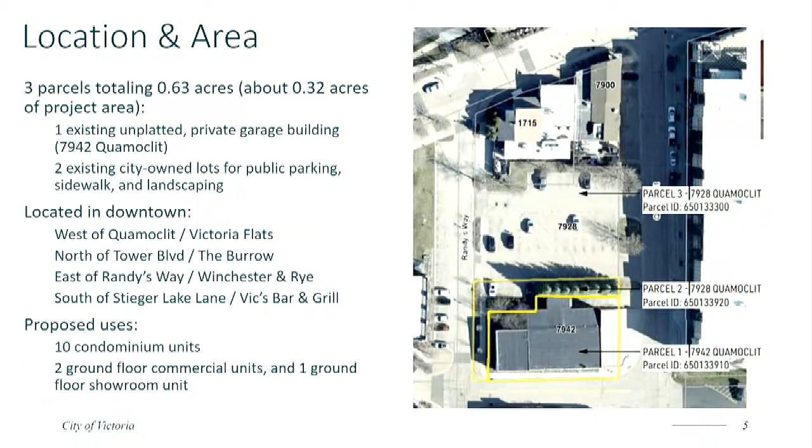So the existing conditions: they have that single structure for a private garage storage, and they also have the adjacent city parking lot, which currently has 43 stalls, with access points from both Randy's Way and Quamoclit. There are also utilities available along Quamoclit and Tower Boulevard, and it's also within 1,000 feet of Stieger Lake, so Shoreland comes into play here.

As I mentioned, this was reviewed back in 2022. There are some renderings attached here showing the previous proposal for the 63-unit apartment building as well as the parking deck, which would have accommodated the commercial users as well as the apartments and provided additional public parking.

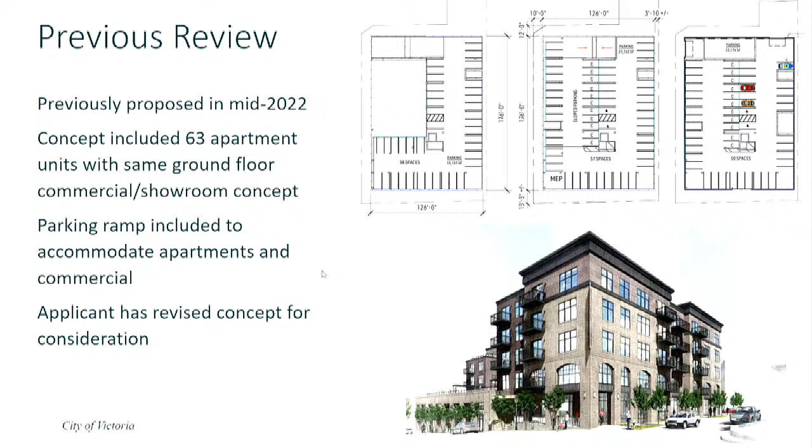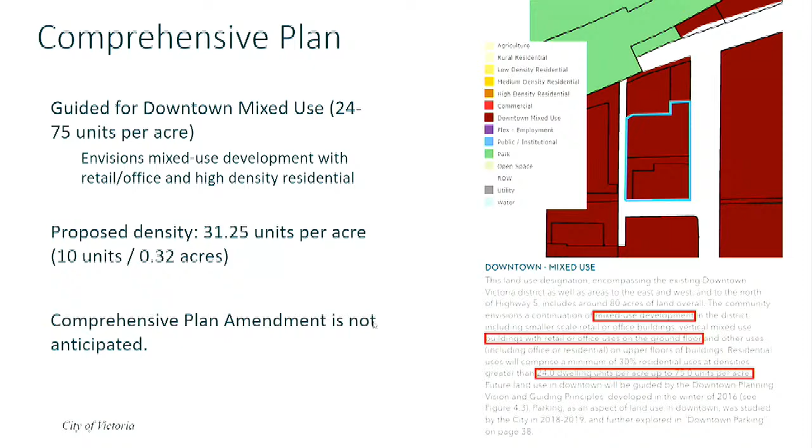In our comprehensive plan, this area is guided for downtown mixed use, which allows development between 24 and 75 units per acre and envisions this type of mixed use development. Their density for this project comes out at about 31.25 units per acre, so it's within that comprehensive plan guided density. So we do not anticipate that a comprehensive plan amendment is needed for this request.

It's also zoned Central Business District, which is our downtown district. We allow mixed-use buildings and various commercial uses such as showrooms with a conditional use permit, so that's part of their request tonight. If they come back at final plat and say they are putting a pool on the rooftop deck, for example, that's something that could require an additional CUP in the future, so we'll take a closer look at that as users become known for those commercial spaces, as well as what type of amenities will come with the building.

The only bulk standard that we have in our CBD is a maximum height of 50 feet. They are proposing 49 feet, so they are compliant with that. And just to note for scale, that's similar in size to the Victoria Flats building, which is right next door.

So for conditional uses, as I mentioned, mixed use and showroom uses are conditional, as well as any commercial use within the Shoreland area. So they have to meet our general conditions per our zoning code, such as consistency with the comp plan, health and safety, compliance with any of our other zoning code standards, adequate public infrastructure, adequate screening and landscaping, appropriate architecture, correct zoning, and that the traffic isn't going to go beyond what this area is needed for.

So none of these uses applied towards our specific conditional use permit requirements that we have in a separate section in our code. And then, as I mentioned, we'll evaluate if they need additional CUPs in the future based on users and residential amenities that come in.

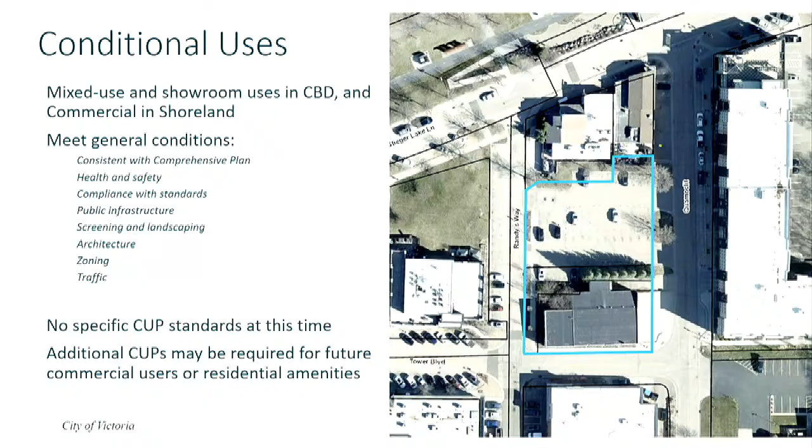So for streets and pedestrian connections, they are proposing only a single access from Quamoclit now. You may recall in one of my earlier slides there was an additional access here; they're proposing to eliminate that. The 2 access points on Randy's Way would remain, so traffic could flow through the angled parking in on the southern entrance and out on the northern entrance, or people could come in and out on Quamoclit.

Additionally, they have the underground parking access directly off of Randy's Way going down into the basement of the building. And just an additional note for pedestrian connections, they are proposing sidewalks around the site and leading up towards the end of Quamoclit there.

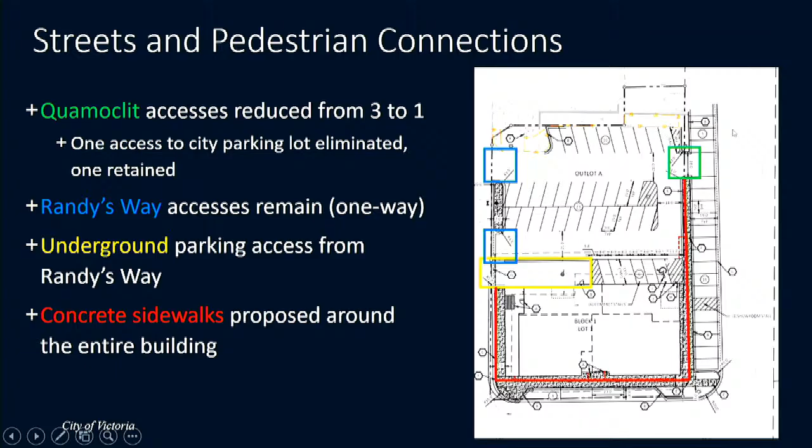For parking, the site currently has 43 stalls. They are proposing a total of 81 parking stalls with the project, so that includes the 20 underground stalls, which gets us to our 61 publicly available stalls. They need 17 stalls for the 2 commercial spaces based on their square footage and our zoning code requirement, and then 3 stalls for the showroom use. So even after those accommodated uses, there are still 41 public stalls available with this project.

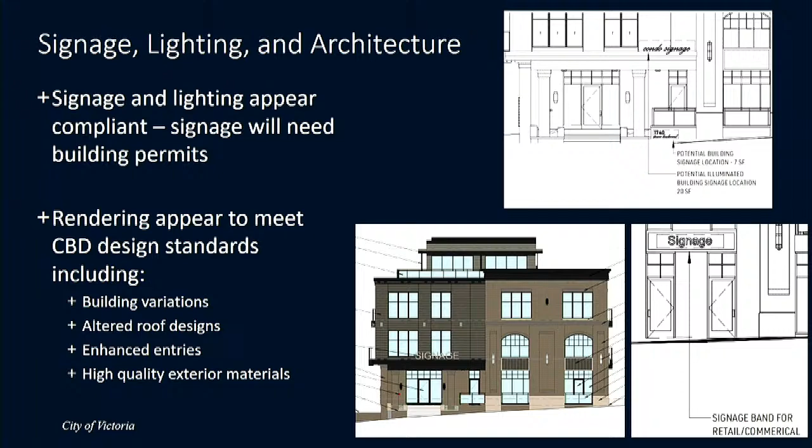For landscaping and tree preservation, they need trees in the boulevard every 35 feet adjacent to the right-of-way. They need foundation plantings placed where practical, and the CBD is exempt from open space and minimum planting requirements. So the tree preservation, we're at preliminary plat here.

Looking at parkland dedication, they would have to dedicate about a fifth of an acre or $21,000 for those 10 condo units, and the commercial projects less than 1 acre are exempt per our municipal code. The cash is anticipated because they aren't proposing any parks or trails with this project.

Then looking at stormwater management, they have to meet the MCWD's rules. We don't anticipate any wetland impacts, but there is some stormwater that needs to be considered, as this site would rely on our downtown regional stormwater facility. And then as part of the variance approval, the DNR has requested that any additional stormwater for this site that is captured over that 80% allowance is appropriately captured and rate controlled.

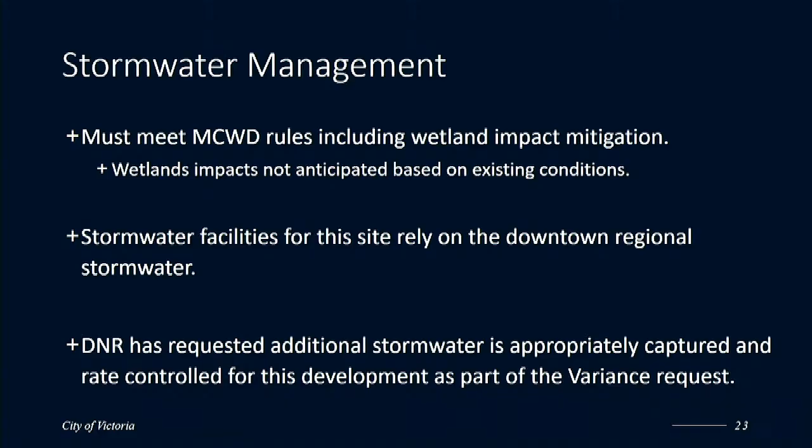For site utilities, water is proposed to come from Quamoclit and sewer from Tower Boulevard. In the staff comment memo attached to this case, there were some minor comments from engineering, but those will just have to be addressed prior to final plat.

Tonight this requires a public hearing. We published it in the Waconia Patriot on November 20th and mailed notice to property owners within 350 feet of the development's boundaries. We also posted it online and at City Hall. Prior to this evening, staff have not received any comments.

Lastly, I have some suggested conditions of approval for you to consider if you're leaning towards recommending approval. I'll note the two items highlighted in blue. Number 2 here, we need a staging plan before we would consider a final plat, because this is a very sensitive area right in the heart of our downtown. We want to make sure that when this development occurs, it will be staged appropriately for construction.

And secondly, that any changes in those commercial spaces — so if the showroom use becomes retail in the future — we want to make sure that's going to be adequately parked as well. Very good, thank you, Brian. Does the applicant wish to speak?

Hi, my name is Marty McCarthy. I'm here on behalf of Monarch Development. I'm one of the developers. We are partnered with another development company called Ganya. Just a little background on myself.

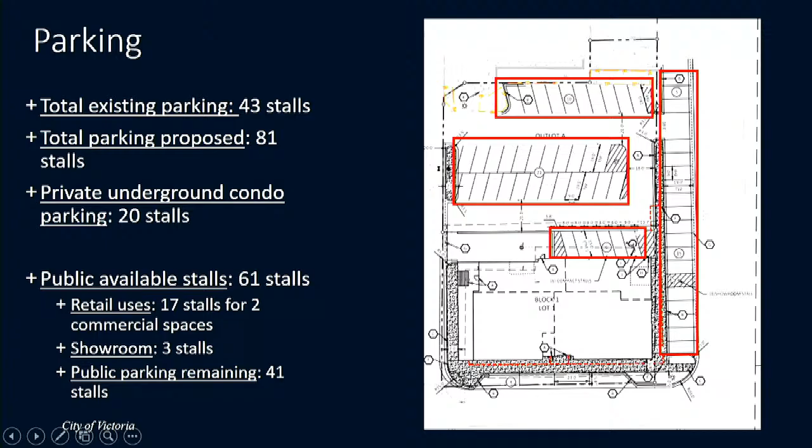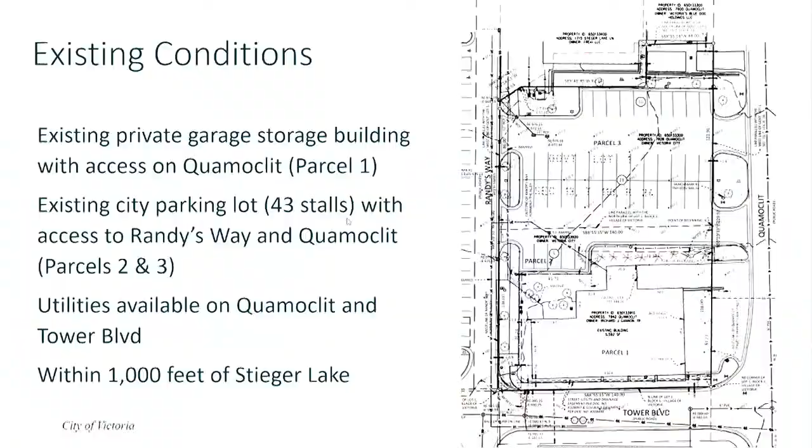Chair and Commissioners, I can jump in here. Looking at this space specifically, going back to the parking slide, they have one dedicated space here that I don't believe was included in the calculation — that's why it's graded off like this. Additionally, in the parking here, we have another dedicated space for that unit. So we have at least 2 spaces in case uses change in the future that could be dedicated towards that. Does that answer your question?

Well, I guess, does it answer the question of whether, if that was converted to retail space, it would then comply with the parking requirements for a retail space?

For a retail space, it would not, based on the size. Our requirement is 3.6 spaces per 1,000 square feet. It's about a 1,400 square foot unit, so we'd probably need about 5 or 6 spaces to be compliant. Now, where those come from in the future, that could be discussed. There are alternative locations within our downtown. We're also looking at other potential areas for future parking internally. So it's something that likely won't be utilized for potentially 20, 30 years, but it's something we should keep in mind.

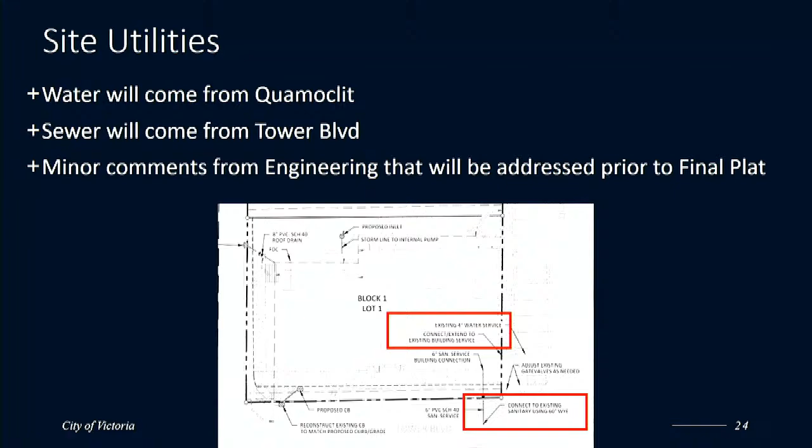Chair and commissioners, sorry, I'm jumping through the slides here. This image doesn't have it, but the plans you're seeing in this presentation are actually a resubmittal after that latest comment memo. We sent a new memo yesterday, but it was too late to attach it to the agenda. The fire department did not have any additional comments related to that hydrant with the submittal.

Mr. McCarthy, I was wondering if you could walk through a little bit on that ramp that goes down to the garage—what kind of safety screening, how high is that wall adjacent to the parking lot that would prevent somebody from climbing over?

The wall is high enough that it would require a safety guardrail. At the top of the wall, there would be an additional railing.

Do you happen to know the total height? Typically 42 inches is required for a guardrail. Do we know how tall that wall is at the deepest part of the ramp? I think it's about 10 feet.

And then, back to Brian, when we're talking about the variance request on impervious surface from 80% to 90%—I'm thinking in terms of the property as it exists today, we've got to be close to 90% already. 82 currently. Okay, so there's only a little bit more impervious surface than what's already there. What are we losing—the trees, the strip of trees? That's about it, correct.

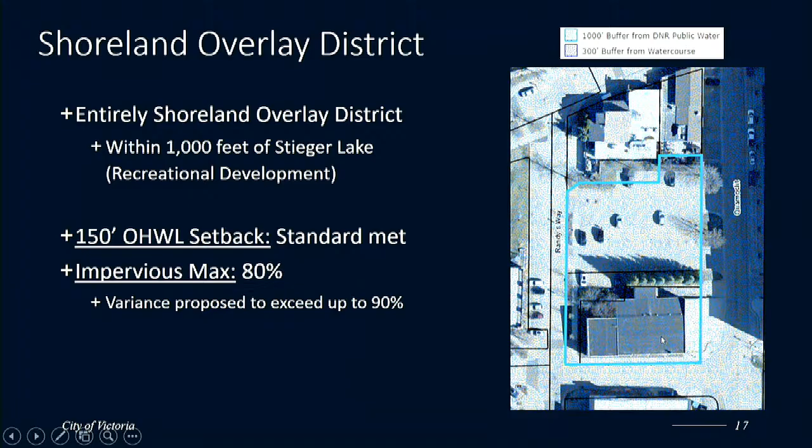So you can see there's a tree here in the image on the right and a row of trees here—that's essentially what we'd be losing. The landscaped islands and areas surrounding the parking lot would remain the same, and they've added a corner boulevard tree and some shrubs in this area as well. We did lose some impervious surface because we were expanding Randy's Way by 2 feet, at the request of the fire department to give a better turn radius onto that road. So we lost a little bit of permeability and island features we could have had.

If I could just add one follow-up question—I think this, Brian, is for you. My understanding of the statute is that the uniqueness test is relative to the uniqueness of the property, and the condition not being created by the owner. We have a plot of land here with a building on it today that has 82% impervious surface. The current plan, as I saw it, was going to go to 96% impervious. The city wishes to impose a standard of 90. Help me understand why this is not due to the plan for the building as opposed to the property itself.

Yeah, I'll comment on this a little bit. I'm Mark Anderson, civil engineer with Sambatek, so we worked on the site grading and stormwater management.

And yeah, you're absolutely right, the impervious area does increase on the order of about 10%. But for a small site like this, it's really a small amount of square footage, and for good reasons. We wanted wider sidewalks for snow plowing, a wider Randy's Way, and more parking. All of that creates impervious area.

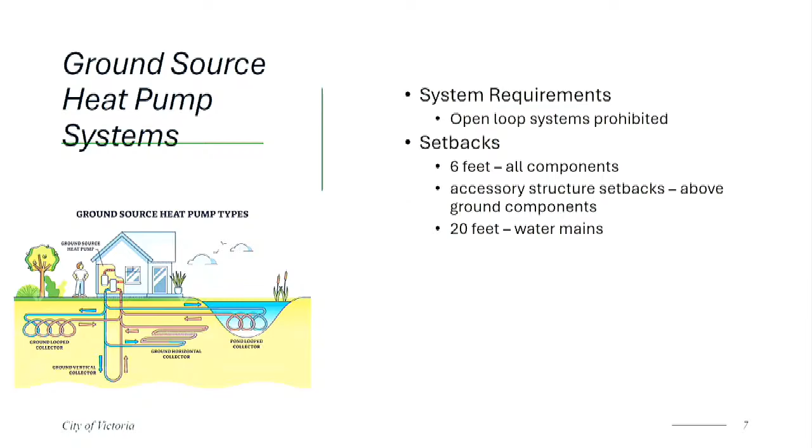Some of the things we also look at are setbacks, which is a minimum of 6 feet for all the components from the property lines, so we're trying to stay out of those easements as much as possible. Generally these aren't placed in front yards, so the 10-foot setback isn't too important to look at. The other thing we want to look at is anything above ground, we want to treat with the same respect to setbacks as an accessory structure. The other thing is 20 feet separation between our water mains, which falls in line with our fence regulations. I'd like to point out that in the packet put out tonight, the ordinances state 5 feet for the 20 feet, and state 5 feet for all components, which was changed to 6 to line up with what we do with other things.

We also look at wind energy systems, also known as WECs, wind energy conversion systems. So if we see that term throughout the code, that's what that means. The big things we looked at are location and height restrictions. We want to make sure they're not over any bodies of water, including any streams, lakes, or rivers. Well, we don't have rivers, but lakes and streams for sure.

We also want to make sure we have a setback, so in the event that one of these systems would fall to the ground or have some catastrophic incident, we're providing a large enough buffer to create safety. That would be 1.5 times the height of the pole and at least 1,000 feet from residential districts. This is a pretty standard distance used in other communities, as well as the safety guidelines for larger windmills. We also want to make sure we have a blade clearance so that if someone was to walk underneath or during any maintenance, they wouldn't get hit with the blade. In the large windmills, if you go up to them, you can actually hear them a little bit on quiet days, because the tip is sometimes breaking the sound barrier, so you don't want to get hit with that at all.

We also want to prohibit any unauthorized access to ladders, so setting a minimum of 25 feet for an access ladder on the outside, or making sure there's a locked door for an internal ladder. We also want to look at the design, sticking strictly with monopole designs unless approved by the city council otherwise, which allows for some creativity while allowing for some uniformity. We also don't want any type of alternative energy system to be used for hanging signs or doing any type of advertising on it. And we want to make sure the design incorporates any safety measures or requirements at the state or federal level.

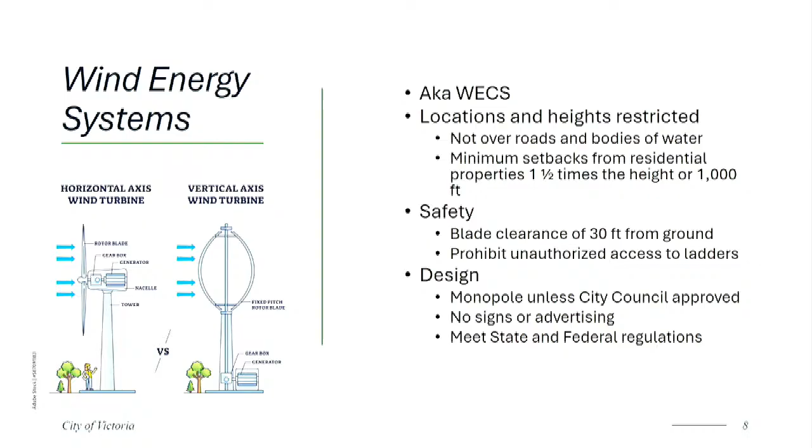We look at solar energy systems. There's three primary solar systems that you'll see. You'll see roof mount on houses where they're mounted directly to the roof. You'll see poles used to mount into the top of buildings. Generally, commercial buildings use some type of structure to elevate it off a flat roof. Or you'll look at something being placed on the ground.

This is permitted as accessory use. It's something that is fairly common throughout Minnesota. We want to make sure that building mounts stay within the footprint and they count towards the height of a building. We looked at the project proposed tonight. They're at 49 feet with a maximum of 50 feet. If they wanted to put the system on the top of the roof, they'd be restricted to no higher than one more additional foot of elevation.

For the ground mounted systems, we want to make sure they meet accessory setbacks. Primarily, if someone was to ground mount on a residential property, it would be in the backyard, but more likely it would be placed on the roof where you'd gain more sunlight. But we do have larger properties that we need to consider in addition to the smaller properties we have in town. We also want to make sure that by the installation of any type of solar panel, we don't create any glare, we don't create any traffic concerns, we don't create anything where the light emitted or reflected could cause discomfort with adjacent properties.

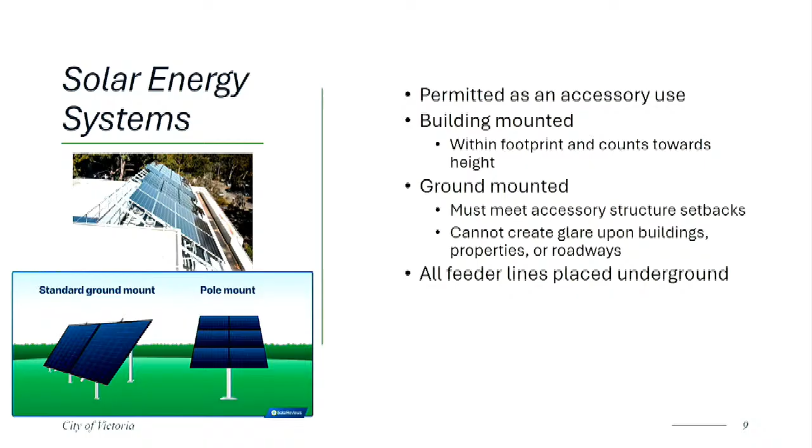We also want to make sure that all feeder lines are placed underground. That's not only a safety aspect, but it's also an aesthetic aspect to take a look at.

There's abandonment and conflict considerations if solar panels are discontinued in their use, as they do have a life, depending on what you get, between 15 and 30 years. Once they've stopped their operation or been disconnected, within 12 months they've got to go. So that would be an enforcement action.

The other thing we want to look at is, especially with solar panels, there's a lot of federal regulations that can get put in place as far as how they're constructed, and there are different changes at that level as well as the state level, as well as goals set in place with the Met Council or whoever. So we want to make sure we looked at the strictest law being used to regulate them. If there's a law stricter than ours, we would use that to apply with any regulations or rules from any of the primarily state agencies.

So with that, is there any questions on the alternative energy systems?

Just one quick one. So, no signs or advertising on the top. What about communication antennas or anything like that? Is that permitted? Commissioner, on alternative energy systems, you generally wouldn't place those type of devices on there. That's not to say they're not used for communications, as far as if you have a windmill put in place of having some type of antenna on top for controlling that. You're talking about like a cell phone tower or something. Yeah. Is that restricted? Correct, so that'd be restricted.

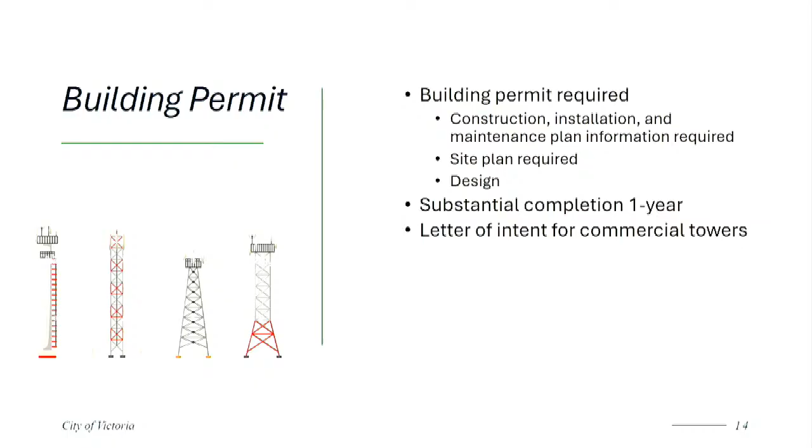We also want to make sure we get a letter of intent from any commercial tower users that would do that. We look at our bulk and performance standards, so there's a lot of things the city is going to want to take a look at to make sure that any tower that's put in place, and its type of use and design, are appropriate for the community.

So we want to take a look at height restrictions, setbacks, where it's placed, what type of construction it is, what the design of the tower looks like, and co-locations.

Generally, when you build a wireless tower, for example, one that I went through is 185 feet tall. It had 5 co-locations on it. What does that mean? It means there are five different areas where you could put five different services. One of those services in the agreement we went through was for the county's emergency services communications—so police bands, ambulance, fire, and things like that.

We also want to make sure that we look at lighting. If there's a tower there, there's minimum lighting that has to be done depending on the height and federal and state regulations. However, we want to make sure we don't have something that's going to cause an issue with the neighborhood or just be aesthetically unpleasing or detract from wanting to be in the area of the tower.

Signs and advertising, again, would be prohibited. These are designed for a specific purpose. They're not an advertisement—we have billboards that would allow for that.

We also require different types of landscaping. The main reason that's in there is when you have a tower, at the base of the tower you'll generally put down what appears to be a 20 or 40-foot conex box, where you'll have your power sources and all the communication equipment needed on the ground to transmit that signal back to the host user. So we want to make sure that's put in place and still aesthetically pleasing, or at least hidden.

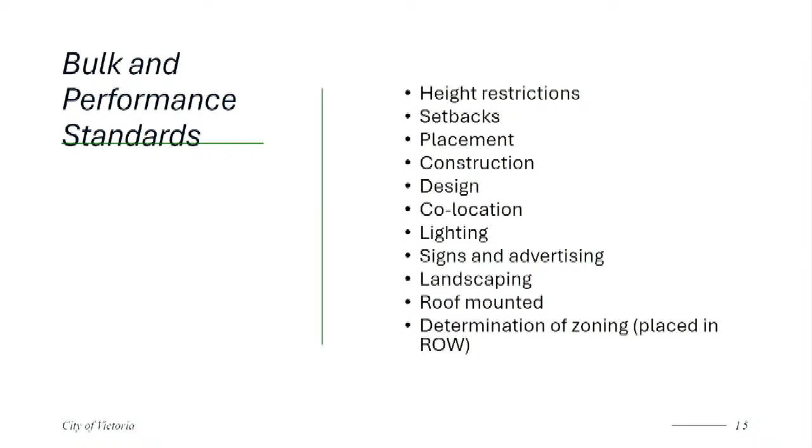We look at temporary mobile towers. There's height restrictions that we want to make sure we place in there, as well as setbacks, restrictions from the residential zoning areas. We want to make sure they're wind resistant. You don't want a temporary tower going up and then falling over.

We want to make sure there's a limit on how long they could be there. 120 days is pretty standard. They don't need a building permit because they're generally on a mobile platform. And we want to make sure that if there's a denial of allowing them in, or some type of issue that's created, they have an ability to appeal that decision with the Planning Commission or the City Council. We also want to make sure they don't interfere with public safety signals.

Now, your temporary mobile towers are generally used for two purposes. One, there's an incident that happens, such as a tornado, if it came through Victoria and took out a cell tower, Verizon, T-Mobile, AT&T, whoever else could come in and they could set up a tower pretty quickly to provide service so that people can still use their phones.

The other thing that happens is when you get a different type of sporting event or large gathering where you're going to have a lot of people using the cell tower, if they don't believe there's enough bandwidth to handle that, companies will generally bring in a mobile tower to handle with that.

Looking at the appeal of administrative decisions, one would be we don't allow them in residential districts, but if they needed one in there, they could come to the Planning Commission or City Council to move it in, else they would have to just stay outside the residential district. Generally these will go up 60, 80, 90 feet in the air.

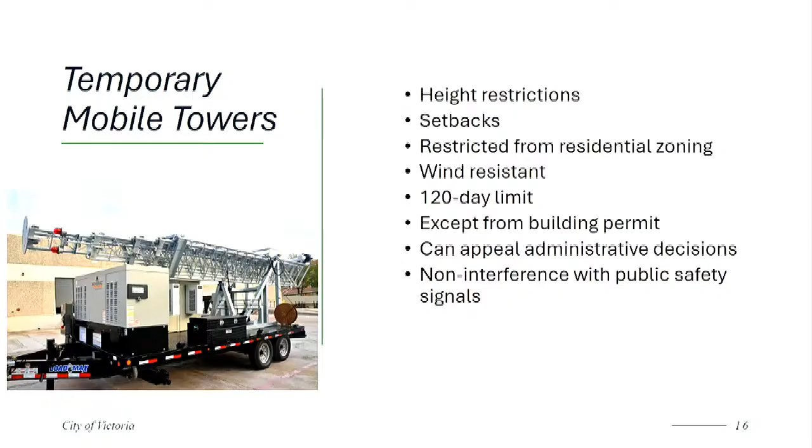So there are various things. The example on screen is just one example of what these can look like. They come in many forms.

Touched on the small cell wireless earlier. You'll see a lot of this is just small cell wireless. Permits are required for it. We can apply reasonable conditions because they would be attaching to public infrastructure generally.

With the application that does not require a conditional use permit, conditional use permits for the land use - right-of-ways don't have a PID to them. They're a right-of-way. We would want to require co-locations.

So if you had multiple providers, say you had a cellular company who wanted to use one of our light poles to put an antenna on, but we also had a telecommunications company that wanted to create Wi-Fi hotspots, we would want to make sure that we put them in the same area. That way the distraction that it creates isn't multiplied by multiple locations.

There's height restrictions, 50 feet or 10 feet above a structure. So if you attach it to a light pole or you attach it to the side of a building, you can go 10 feet above it, but you wouldn't be able to attach it such in the air that the top of it would be greater than 50 feet.

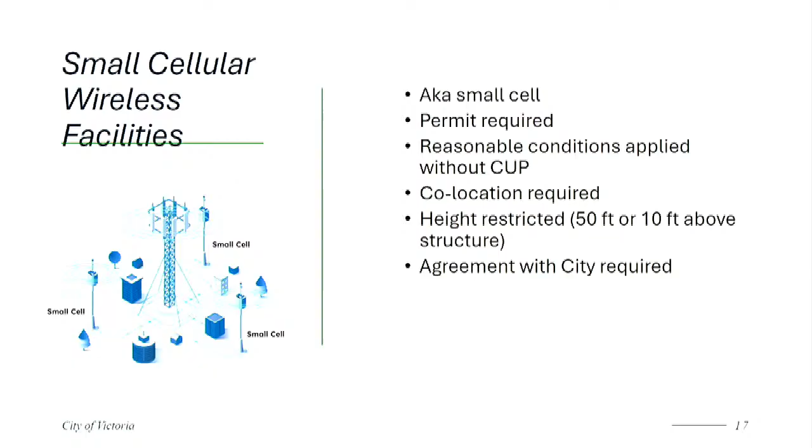The other part to it is if it's placed in the right of way, you need an agreement with the city. That agreement allows the city a lot of flexibility with the design, or maybe trying to mask what an antenna would look like sitting on top of some of the infrastructure.

The other thing we also want to look at, same with WECS and those type of systems and the solar, if it's not used within a 12-month period, you have 12 months to take it down. Solar's a little bit easier to take down depending on its size compared to, say, a 200-foot tower. And then unused portions of a co-location tower after 6 months, you have to start decreasing it.

So if a company wanted to come in and put in a tower that was, say, 120 feet tall or 100 feet tall, and their co-locations can't use it, whatever the highest location they have something on, anything above that would have to be removed at either 25% or at least 30 feet.

And then we look at interference. We want to make sure none of these signals interfere with public safety. When we look at towers going in, regardless of the tower, generally you'll get an RF report, and they'll take a look and try to make sure that none of that goes there.

We'll also run any type of application through the county's emergency management to see if they have any concerns with signals or placement, because those need to be considered when towers are constructed. We also want to make sure they meet state and federal regulations. Nobody on staff is an expert in towers or radio frequencies or that type of math. There are specific engineering jobs out there that handle that type of stuff.